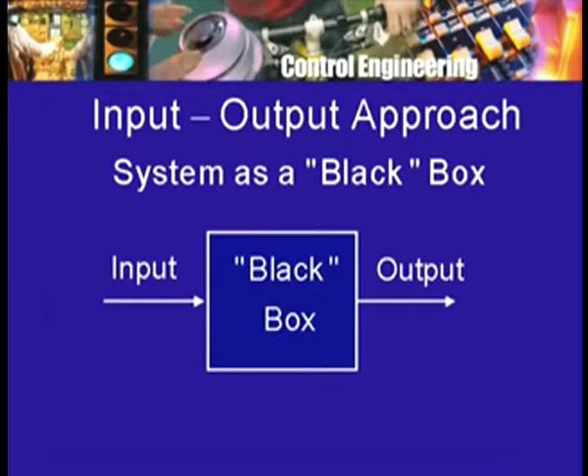Well, as the phrase suggests, what we have to do is apply what is called a time shift or time delay, usually in practice, to an input. To take a simple example, one may apply to a system a pulse of a certain duration and shape, starting at some particular instant of time, and then observe the response for some period of time. Then after some time you may again apply the same pulse, with the same shape, width, etc., and observe the response.

Now, you are applying in a way the same pulse, in the sense the pulse shape is the same, but you are applying it starting at a different moment of time. So, this is what is meant by a time delay or a time shift. The response, of course, for the shifted or delayed pulse will begin later, but what you can ask is whether the shape of the response is the same as the previous response, except for the time shift. Now, this can be done with the help of some notation, and it is the idea that is important, not the notation.

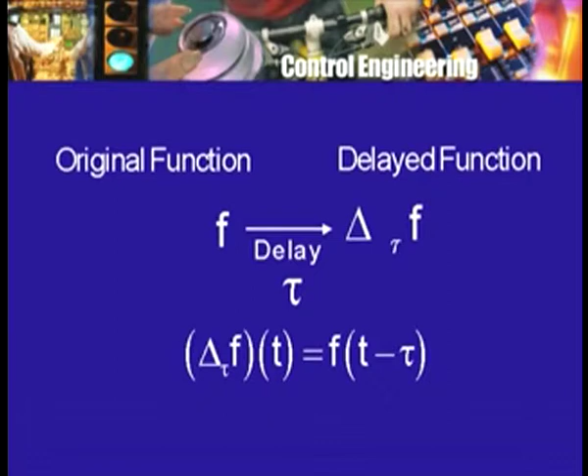Given any function of time, say f or f of t, one can talk about its delayed version, and several notations are in use. Since we have already used the letter d to indicate derivative, I cannot use d for delay, but one may use the letter delta for delay. So, delta is the delay operator, and then you have to indicate by how much time interval the function is going to be delayed. So I could write it as delta with a subscript tau, tau being the time interval, operating on f. Now, this produces the delayed function, the function f delayed by an amount tau.

To take a specific example, let us say here is the time axis and here is the pulse that I talked about, and let us say it goes from 0 to 1 second. So this is the function f as it were, and now if I were to delay it by, let us say, 2 seconds, then the pulse will start at 2 seconds instead of 0, and then last for 1 second as before, going to 0 at 3 seconds. So this function will be denoted by delta tau f, or in this case, since tau is equal to 1, delta 1 f, that is, a function f delayed by 1 second.

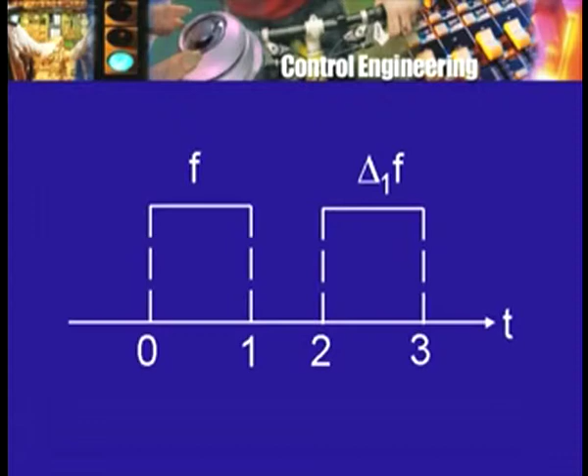So, if this is the input, there will be a certain response, then you apply this input and observe the response. Just as this input is a delayed version of the original input, you try to see whether the response to the delayed input is a delayed version of the response to the original input. If this is so, the system is said to be time invariant, and if it is not so, the system is said to be time varying.

Now, this does not require you to know what is inside the black box, what kind of devices, what differential equations or algebraic equations or whatever that relate the response and the input variables. It is a test which can be performed externally, so to speak. But on the other hand, as you are already familiar, one can look at the set of equations or the model, and by looking at the form or appearance of the model, one can say something about time invariance or time varying nature of the system.

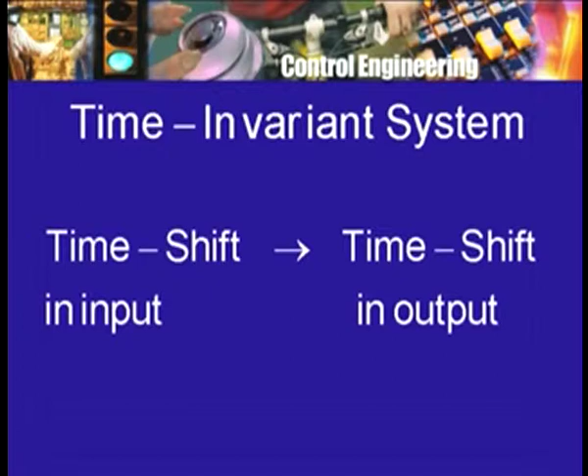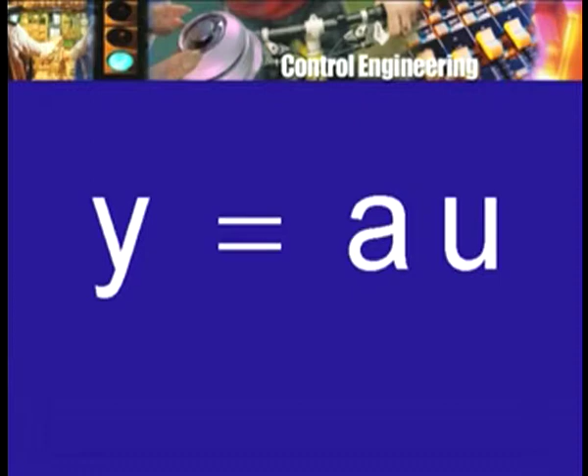Again, to start with a very simple example, if the relationship between the input u and the output y is simply y is a scaled version of u, y equal to a u, then it is not at all difficult to see that this system is time invariant, and of course, the coefficient a is just a constant.

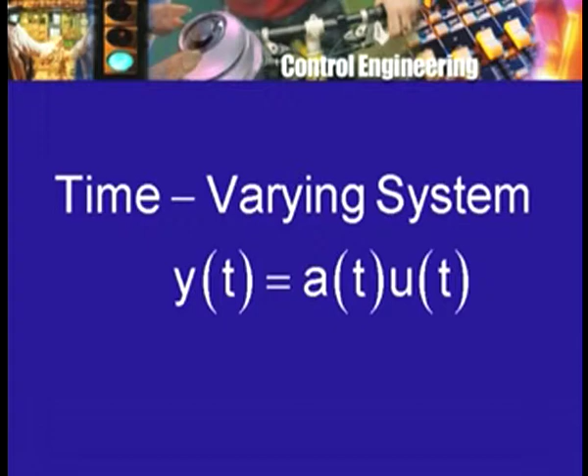Whereas, if I had y(t) equal to a(t) into u(t), where a(t) was a function which was not constant, then one can see that the relationship between the input and the output is going to vary with time, and therefore the system described by this relation is not going to be time invariant.

Similarly, if I write down a differential equation, let us say Dy equal to ay plus bu, as we have done already, a little argument will show you that if the input is delayed, the response will be delayed, as in the case of linearity, provided the initial condition is 0 or the initial condition remains the same.

That is, the response to an input starting with initial condition 0 is one response, and the response to the delayed input starting with initial condition after that delay also 0 is another response. Then the response to the delayed input will be the delayed version of the response to the original input. This can be seen by making use of the definition of the delay operator and substituting in the differential equation and seeing that this is so.

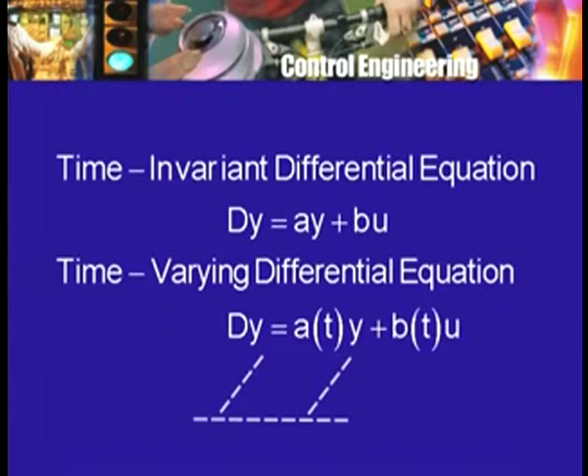This is because of another property of the derivative, which is a little difficult to talk about, although it is not very difficult to see. If I have a graph here like this, and if I shift the graph by a certain amount, then the derivatives also get shifted by the same amount. That is, shifting the graph horizontally along the t axis does not change the derivative values, it only changes the instance of time at which the various values are taken by the derivative. Of course, the shape of the wave or the function remains the same. So this is a property of differentiation, that differentiation is invariant with respect to time shift, or to use a more sophisticated word, translation in time.

So much for time varying or time invariant and linear or nonlinear systems.

And as I said earlier, the method of Laplace transformation and therefore the S domain methods using that, such as the root locus method, the Routh criterion or test for stability or location of roots of a polynomial, and the frequency domain methods such as the method based on Bode plots, Nyquist criterion, Nichols charts, etc., are not applicable for systems which are nonlinear, that is, which are not linear, or for systems which are time varying or not time invariant.

Now, of course, as I told you earlier, nonlinear systems and even time varying systems do occur in nature and in engineering practice. The pendulum, whose swing is not sufficiently small, or in fact for no amount of swing, is the pendulum exactly described by a linear differential equation. So it is a nonlinear system. The fly ball governor would be another example of a system where there would be a nonlinearity.

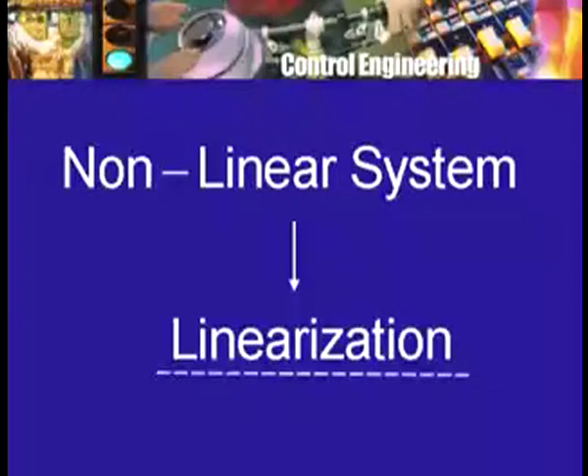In the case of nonlinear systems, when they are approximated by a linear model, the process is known as linearization. Now, of course, this only results in an approximation, and unfortunately one may not be able to know or say much about how good the approximation is. This is one of the major problems which persists even today.

In fact, the nonlinear model of the system itself is an approximation to the actual behavior of the system, because you may have neglected so many things, you may have assumed that some things remain constant and so on. So the physical system is one thing, the nonlinear model of it is only a model, that is, it is only an approximation to describe the behavior of the system.

And then the nonlinear model, now you want to replace by a linearized version. So there is a further degree of approximation, and unfortunately it is not always very easy to find out how good or how bad the approximation is.

However, it was not as if the things were that hopeless. In fact, around 1900 a Russian mathematician by name Lyapunov did some work on nonlinear systems, and essentially those were systems which also involved inputs, that is, therefore his work was applicable to nonlinear control systems.

He introduced an approach known as the Lyapunov method, and showed that under certain conditions, if you replace a nonlinear system by an appropriate linearization and study the stability properties of the linearized system, you can infer something about the original nonlinear system. He introduced a function which has become known as a Lyapunov function, and a lot of work was done at that early time, but it was done in Russia.

I gave you an example of such a system already, namely writing it in vector notation: dy equals Ay plus Bu, where y is not a single variable but a vector of several variables, say y1, y2, up to yn. So there may be n different variables, not just one response variable, and u may be a single input.

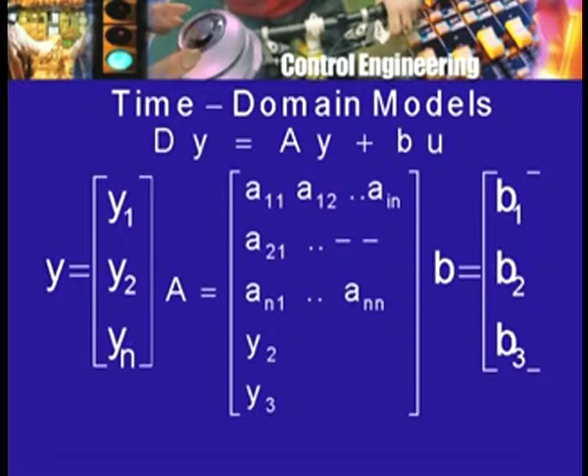In this case, the notation I have used is such that u is a single input, but again u can be a vector input, that is, the system can have more than one input. A is a matrix of coefficients a11, a12 and so on, and B is a constant vector, again involving a number of components.

Now, such a system of equations, which made their appearance and began to be studied and used as the model starting with the 1950s, are known as state variable equations, and such a model is known as a state variable model. In fact, usually the y that I have talked about, as I told you, the letter y in control theory practice is usually reserved for an output.

U for an input. Then what is this state variable? These state variables will not be either input—they may be an output variable or they may not be an output variable. We do not have time to go into these details. Usually your textbook will have a chapter on state variable formulation of system equations, and in particular of control equations, so you should take a look at that.

In that case, the state variables will be a set of variables x. Again, this may be more than one, so this is a vector. The input variable u may be one or more. The output variable y may also be one or more variables, and the state variable equation model, which is very commonly used, is then dx equals Ax plus Bu.

D denotes the differentiation operation, A is a matrix, B is a matrix. In general, the output vector, as it is called, y, is related to x and u through an equation like this. So this pair of equations is referred to as the state variable set of equations. These are known as the state equations, and this set of equations is known as the output equations.

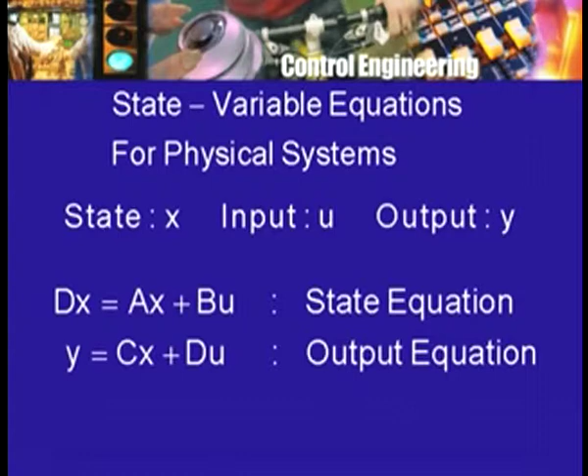So this is the kind of model that one can start with, instead of starting with transfer function or frequency response ideas. In fact, if you recall, when we started our discussion of the DC shunt motor driving the load, the simplest load we talked about, we in fact wrote down differential equations. Of course, in the beginning we said let us consider the operation of the motor in the steady state.

So, the current is constant, voltage is constant, torque is constant, speed is constant. In that case, there are only algebraic equations relating the various quantities. But since we are interested in the transient behavior, what happens when the motor is switched on, or the load changes suddenly, or the supply voltage changes suddenly, we have to write down the differential equations for the system, and this we did. Let me recall them.

The armature circuit of the motor gave rise to the equation EA of t, written as a function of time explicitly to allow for the fact that the armature voltage may vary. This equals the back EMF, which is Kb into omega t, because the speed also may vary with time, plus the term Ra Ia of t, the armature resistance drop, plus the term due to the inductance of the armature, La dia/dt.

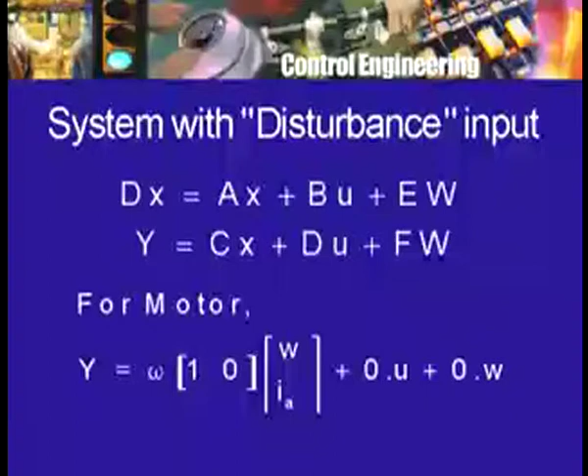What I have written down in the matrix form is only for a linear system. The matrices A, B, etc. may not be constant matrices, that is, they may have functions which change with time, therefore it can represent linear time varying systems as well, but linear systems. However, one can think of differential equation representation of nonlinear systems and even time varying systems.

A fairly general way of doing that is as follows. Symbolically, I will write x dot, or dx, equals f of x, u, maybe w, and t. What do we mean by this? X is a vector consisting of several state variables, u is a vector of input variables, similarly w of disturbance variables. What is this f? This f stands for a vector of functions, not just one function.

In other words, this compactly represents a whole set of differential equations. X1 dot, the first state variable, its derivative is a function f1 of all the state variables, perhaps x1 to xn, all the input variables u1 to up, all the disturbance variables w1 to wq, and also a function of time itself. This is what is meant by f1. Similarly, x2 dot will be equal to a function f2 of all these variables, and so on.

Now, these functions f1, f2, f3 etc. put together constitute the vector f. So this is a more general state variable formulation of a system which could be nonlinear, because there is no restriction put on function f1. The system could be nonlinear, t appears here explicitly, so the system could be time varying. As you can expect, a large number of systems can be represented by a set of first order differential equations like this. This is the state variable formulation for systems which may be nonlinear or time varying.

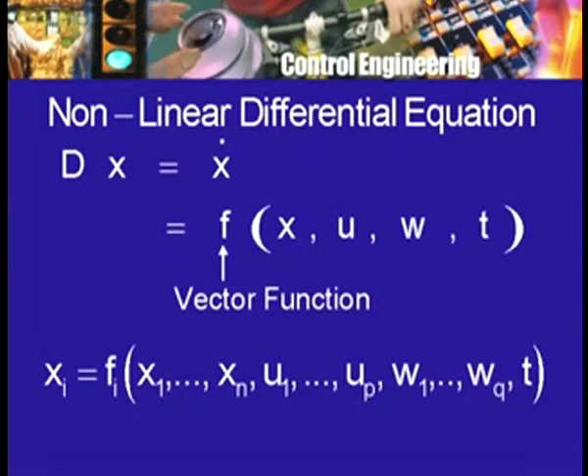Of course, all this is for what may be called lumped parameter systems, because we have only ordinary differential equations. There is only one independent variable t, and a finite number of state variables x1, x2, xn—lumped parameter systems. Our motor control system is an example of a lumped parameter system, in the sense that we are looking only at two state variables, speed and armature current, and we have only ordinary differential equations.

I mentioned earlier that one can encounter distributed parameter systems, that is, systems which are extended in space and cannot be considered lumped. A resistor, or an inductor, is also distributed in space, but a resistor is represented by a simple relation like V equal to Ri, terminal voltage V, current I. Similarly, an inductor is distributed in space, but we can represent it by a differential equation like voltage equal to L di dt. This representation ignores the distributed nature of the inductor, but in many field problems we cannot neglect this variation over space.

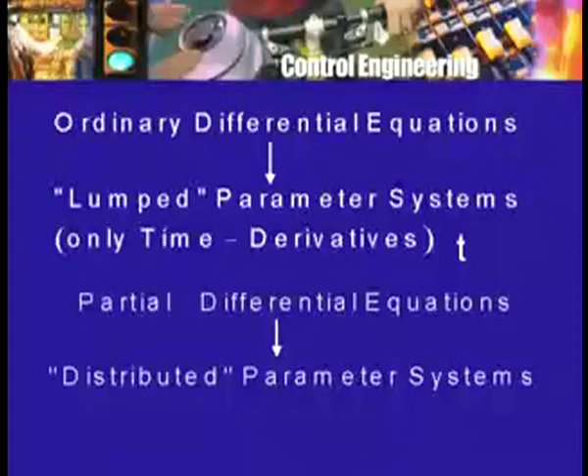In many problems arising in process control—heat transfer, mass transfer, flow of fluids and so on—things vary in time and also in space; the space variables are equally important. Therefore you do not have just one independent variable t, you have additional independent variables, and as a result the differential equations you get are not ordinary differential equations, but partial differential equations. The subject of partial differential equations is more difficult than ordinary differential equations, but one could talk about a similar kind of formulation for partial differential equations as well, although it is not as general as one may want.

Let me illustrate the time domain method for our motor control problem. I will not go into full details, but I just want you to get an idea of what exactly is involved and how the time domain approach will differ from the S domain or frequency domain approach. We have a pair of differential equations describing the control system, and they could be rewritten in state variable form. There is one way of handling these equations in state variable form which involves a lot of results from matrix theory—I will indicate them to you a little later, after we look at a somewhat simpler approach.

Here are the two differential equations which involve armature current and the motor speed omega. The variable of interest to us is the motor speed omega, so a natural thing to think of is to eliminate the armature current. In fact, for the steady state equations, this is exactly what we did earlier to find the relationship between steady state motor speed, load torque and applied voltage. The armature current was not of particular importance, although it was relevant because it should not become very large.

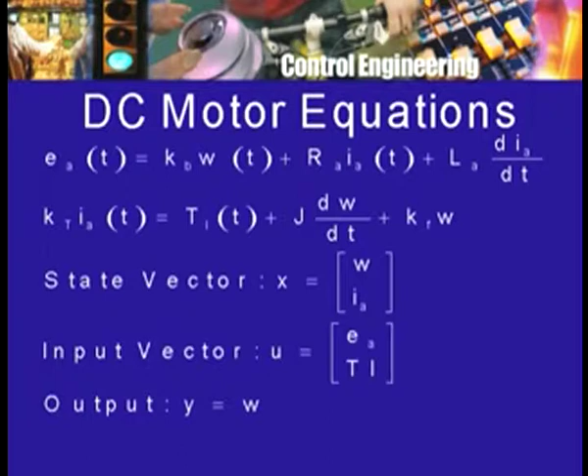What happens to the input terms? We have the input EA, the armature voltage, and the load torque TL. Now, what is going to happen in general is that when we eliminate the variable IA, derivatives of these two input variables may also appear, and so we may have a set of terms like B1 into derivative of EA plus B0 into EA plus C1 into the derivative of the load torque plus C0 into the load torque.

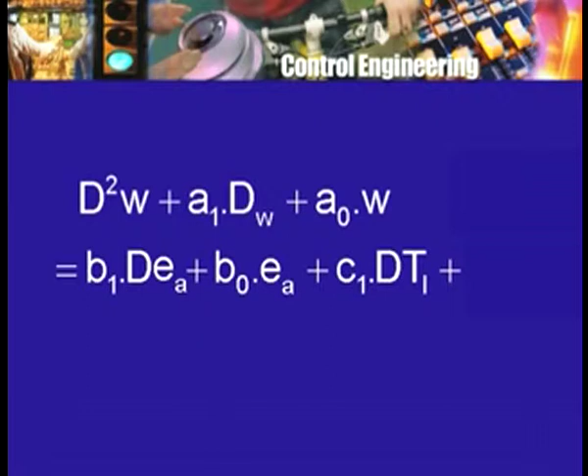So on the left hand side I have the variable omega and its first and second derivative. On the right hand side I have the input variable EA and its first derivative, and the disturbance variable TL and its first derivative. This is the kind of differential equation I get, and we had looked at such a differential equation earlier when we got introduced to the method of Laplace transformation. At that time we talked about several parts of the solution or response omega, namely the one that corresponds to zero input or zero initial conditions and so on.

Now, we can talk about this equation in exactly the same way, although the method of solution need not be based on the Laplace transformation. In fact, we had seen a method of solving a differential equation without involving Laplace transforms.

So let us assume for the moment that we are looking only at the part of the response that will remain when the applied voltage is 0 and the load torque is 0. For example, the motor has been running for some time and then you suddenly change EA to 0 and you suddenly change the load torque to 0. That is, there is no longer any load and there is no longer any power supply, but the motor was running. Therefore, because of its momentum, it will keep on running for some time. So imagine we are studying the motor under that condition.

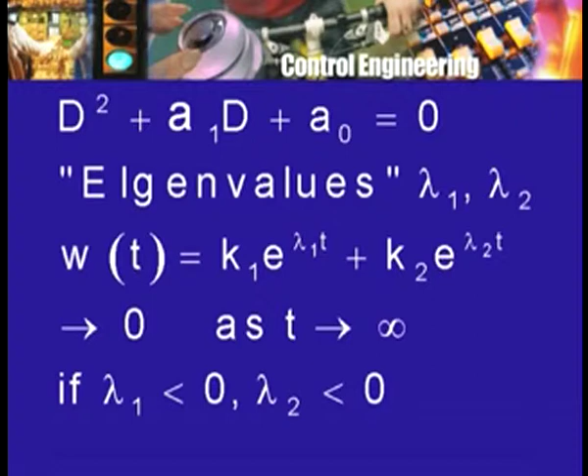Our differential equation is given like this. So what is it that we can change? This is where we can use some of the ideas from feedback theory that we have studied earlier, namely proportional feedback, derivative feedback, integral feedback, and so on.

We have the input variable EA, which we had put equal to zero, but now, as in the case of feedback, we could have the input variable coming not just from the applied armature voltage or reference voltage, but from a difference of two signals. One was the reference voltage, let's say RT, and the other was the signal obtained as feedback based on the speed, and this difference could be EA of t. So EA of t could be RT minus this feedback signal, and even if RT is set equal to zero, the feedback signal is still there—so although the external voltage is reduced to zero, internally to the motor the applied voltage is not necessarily zero.

So we can express EA as RT minus—what did we have earlier? We had k times the tachogenerator omega. There was a gain k introduced because this difference may be small enough, and therefore we really had EA equal to k, the gain of the amplifier, multiplying R minus k tachogenerator omega. So this is what one may think of doing.

Now, if you take the differential equation we had here, and EA is replaced by—or EA is obtained as—k times R minus k tachogenerator omega, you will see that because there is this multiple of EA here, a multiple of omega will be introduced on the right hand side. And because there is a derivative of EA and a multiple of it here, the derivative of omega also will appear on the right hand side.

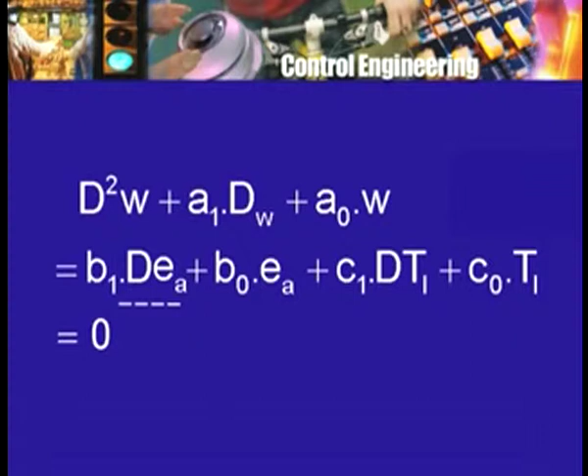Of course, in addition, R and dr will appear on the right hand side. So what is going to happen, I am going to show it only symbolically, I am not going to write down the exact expressions.

We have on the left hand side d square omega plus a1 d omega plus a0 omega, written simply as this operator acting on omega. Because of the feedback EA involving omega, there will now be a term with d omega on the right hand side, a term with omega, a term involving dr, another involving r, and then as before the torque terms dTL and TL. So with feedback, and what kind of feedback is it? It is proportional feedback, because we are taking a multiple of the variable omega as the feedback signal, then taking the difference between the reference signal and this, amplifying it to generate the applied armature voltage EA. So this is what the equation is going to look like.

Now we can set once again R equal to 0, TL equal to 0, that is the external voltage is made 0 and the load torque is reduced to 0. What will happen? Now we have these additional terms on the right hand side, and we can transfer them to the left hand side. Therefore the left hand side now, with this change made, will look like d square as before, but not a1, but a1 prime d, that is the coefficient a1 will change, plus not a0 any longer but a0 prime, times omega, equal to 0.

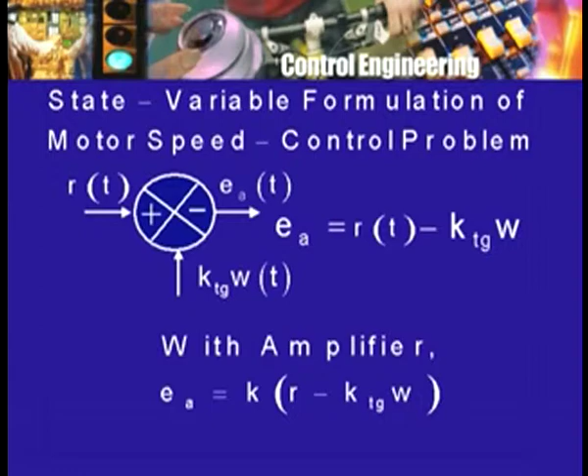I would like you to work out the exact expressions for a1 prime and a0 prime in terms of the old coefficients a1, a0, and the parameters of the feedback, namely the tacho generator coefficient and the gain of the amplifier k. But the point is that the differential equation is changed, the characteristic equation is changed, and therefore the solution of the equation will also change.

We expect therefore that the eigenvalues will have changed. The solution may still go to 0 as t tends to infinity, but it will do so in a different way, at a different rate. So we can now pose the problem: is it possible, by using this feedback, choosing the tacho generator coefficient and the gain k, to change a1 and a0 in such a way that the behavior of the system is improved, the response of the system is changed to what we want? Originally the time constants may have been large, typically one of them is large, the other may not be so large. We want to reduce them.

Can it be done? We can also ask whether the system can become unstable by means of this feedback. That is, the roots may become such that they have a positive real part, or they become purely imaginary, so the system response becomes oscillatory or even tends to grow exponentially. Can that happen? The answer in this case is no.

As we saw earlier, using the method of Laplace transform and transfer function, and the root locus approach, proportional feedback will not cause any instability, but there could be oscillatory behavior of the system, damped oscillations. You can check using this approach that this can happen.

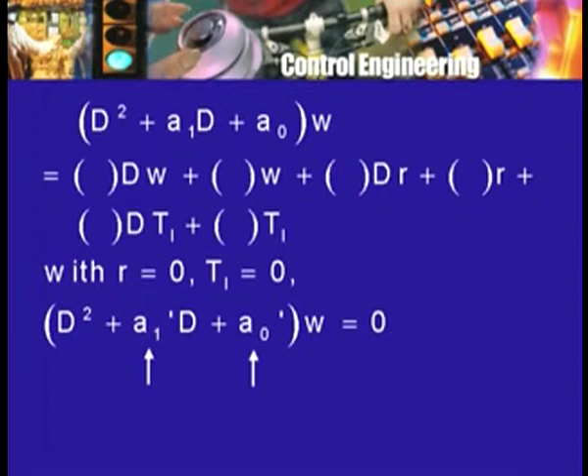In this approach, of course, I have not taken Laplace transforms anywhere. I am only looking at the characteristic equation of the system. I know that if I factorize the characteristic equation, certain coefficients or eigenvalues appear, and they determine the nature of the response of the system. I am making use of that, answering questions which we had looked at and answered earlier using the method of Laplace transformation. So this is something I would like you to carry out for yourself, and this is an example of a time domain method.

Now this is about proportional feedback. What about derivative feedback? Can we use derivative feedback? What about integral feedback?

Can we use integral feedback? As you can see, the computations won't be very different from what we did before, though of course the result will be different.

Suppose I want to introduce integral feedback. What did we do? We introduced the integrator after the output of the difference device. So here is R, here is the feedback signal which is k tacho generator omega, here was the difference signal, and then we had k divided by s when we use the transfer function notation. This was the integrator. Now what is it that I am doing?

I do not want to use the s variable anymore, because I am not thinking of Laplace transformation, I am thinking of an operation of integration. So what should we do? Let us call this, once again, the motor armature voltage EA. Let us call this other variable E, as is traditionally done. In terms of transfer function, EA of s equals k by s into E of s. But what about as functions of time? What is the relationship between E and EA?

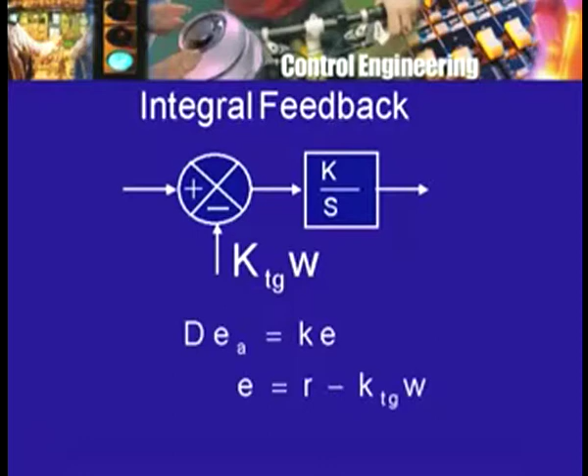So what is going to happen here is that the differential equation will no longer be of second order in omega, but will be of third order in omega. We would like to eliminate the variable EA, set R equal to zero finally, set TL equal to zero, and obtain that differential equation. Check for yourself that it is a differential equation of third order. So the order of the system goes up by one.

So we will have more coefficients now, but again we can factorize the characteristic equation, look at the eigenvalues, see whether they all have negative real parts or not, and so on. This is something I would like you to do, and then we will complete this example as an illustration of one approach, one time domain approach. The other time domain approach will involve some matrix theory and matrix manipulations, so I will not be able to go into great detail as far as that other approach is concerned.